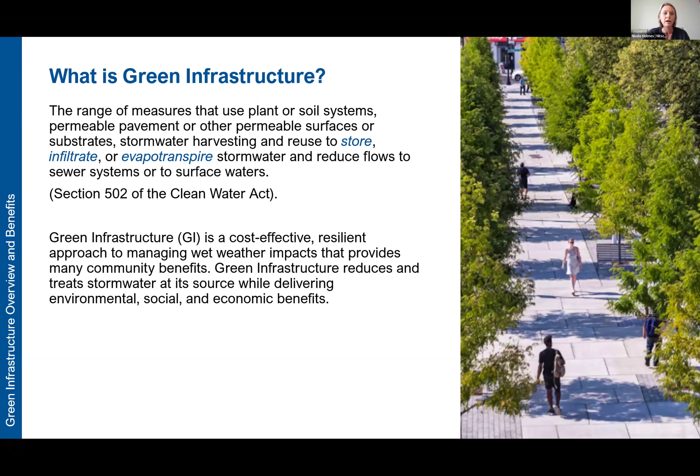I like to give this contrast of the way stormwater had been traditionally managed versus the way we're thinking about managing stormwater today. Really, green versus gray infrastructure, managing stormwater at the source versus end of pipe. So traditionally, catch basins and piping systems were designed to collect water as quickly as possible and get it away from the site as quickly as possible, discharging it to the downstream water body, causing environmental issues including water quality and downstream flooding and erosion.

We all know that. Green infrastructure actually strives to absorb the water close to where it lands, if not right where it lands, giving it a chance to be taken up by plants, to evaporate, to infiltrate into the ground. And only when those systems have exceeded their capacity would that water overflow to the gray infrastructure systems, the pipes, ultimately discharging to our water bodies.

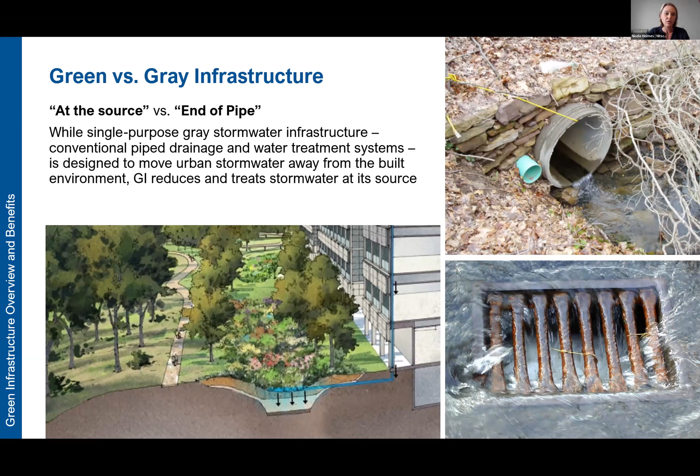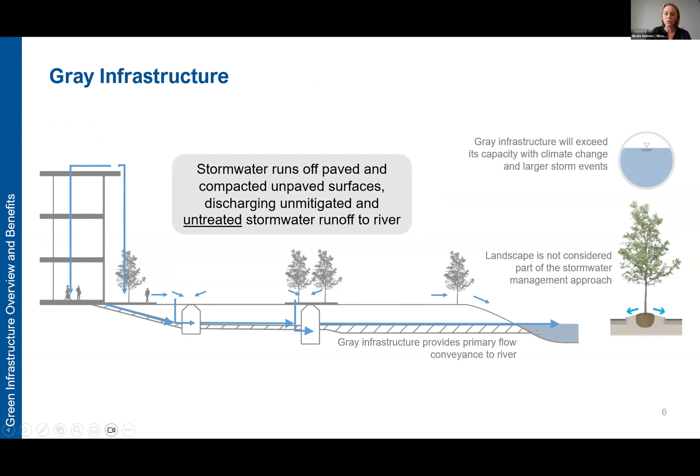So this is sort of just a cutaway. Let me just get this out of my way. A cutaway of what we're talking about here: collecting water straight from the roof drain, straight from pavements and parking lots, and discharging it to the local water body, versus considering green roofs or rainwater harvesting for rooftops.

Basically draining water from paths and walkways to adjacent depressed landscape areas using permeable pavements. And so you can kind of see all these arrows that we're starting to think about, all the ways in which we're trying to absorb water, get it into the ground, get it back into the atmosphere. And again, only when those systems have exceeded their capacity would we be considering overflowing the water.

So really this approach is going to take some time, but at some point in time, if we could picture an ideal world where everything was green infrastructure, all of that gray infrastructure that is currently completely under capacity for today's events, we could start to think about that as kind of being a secondary conveyance. Green infrastructure is the first priority, and the gray infrastructure can kind of become a secondary method.

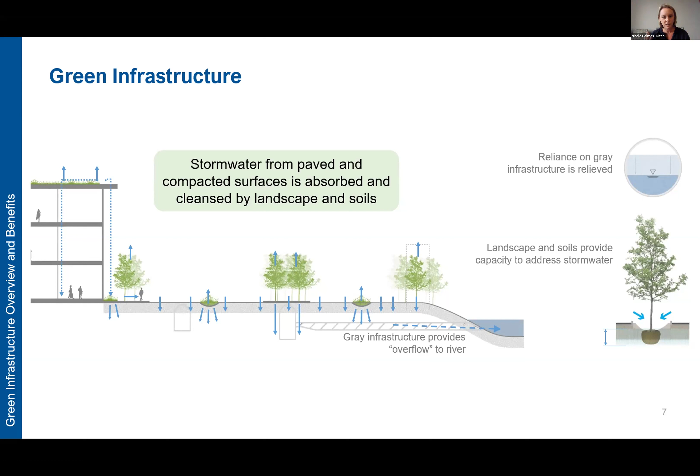And really the difference is that when you walk around, you see a lot of landscapes really barricaded by curbing, or the landscapes, instead of being depressed, are elevated. So we're starting to think about ways that we can certainly integrate stormwater and landscape as much as possible.

And then I mentioned this originally, and as I talked about some of the co-benefits beyond stormwater benefits, we know stormwater quality can be improved. Volume is reduced because we are infiltrating more water into the ground, and in some cases evaporating and reusing that water instead of allowing it to run off. And we are reducing peak flows because green infrastructure can absorb and significantly slow down water contributing to the storm drain system. But there's many co-benefits.

Some of them are measurable, like carbon sequestration and heat island and improved air quality. And some are qualitative, including improved quality of life. And there's definitely many studies that talk about the benefits of having more green infrastructure and trees in a neighborhood in terms of things like increased property value.

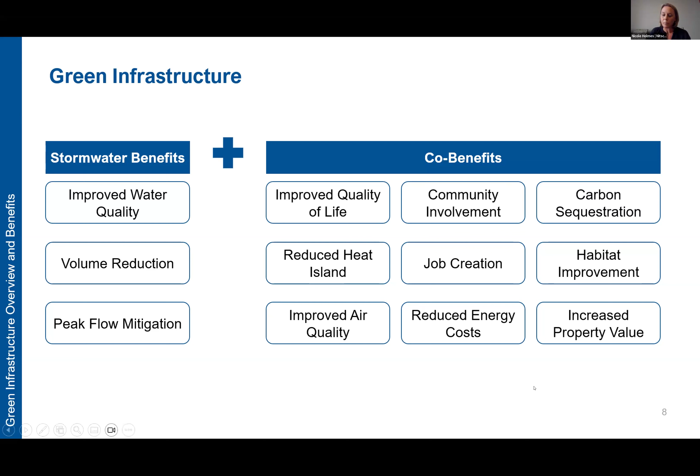So, here's just a sampling of some of the types of successful green infrastructure installations, or resilient stormwater installations. I think pretty much all that I have worked on and that my firm has worked on, and hopefully in collaboration with some of you, but certainly looking at bioretention practices, an innovative water quality treatment system at Kroon Hall. I'm showing some permeable pavements here.

And even a lot of these things, there's kind of a thought that it costs a lot of money to do these things, but that picture on the top right at Stonehill College is a very effective strategy. It's low tech, low cost, and low maintenance, and that's exactly what they wanted, but it's highly effective. Constructed wetlands, tree filters, and green roofs.

And we're also looking at some very large scale systems on campuses, including the system you see here at Princeton University, where we actually integrated a large scale stormwater system with a new geothermal system beneath a soccer stadium. And we worked on that in collaboration with Sasaki and many others.

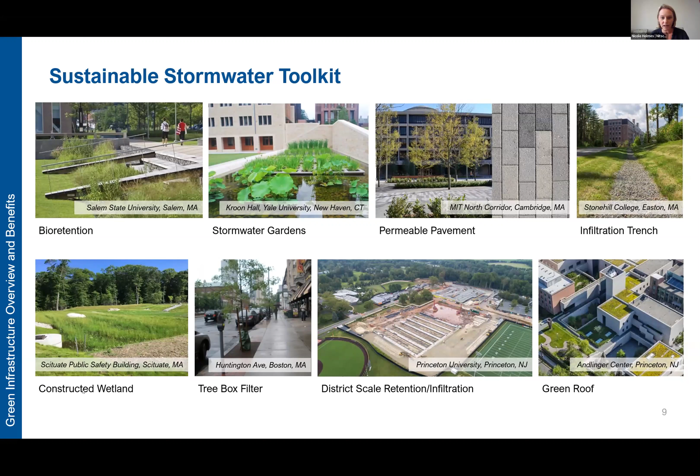All right, so I'm just going to share quickly a few resources. The first is the Boston Green Infrastructure Handbook, and you can find this on Boston Water and Sewer Commission's website, as well as the City of Boston's Green Infrastructure page, so you can get to it either way. And this was developed, I think, 2 years ago, really as a way to help start to coordinate green infrastructure planning and design in the City of Boston.

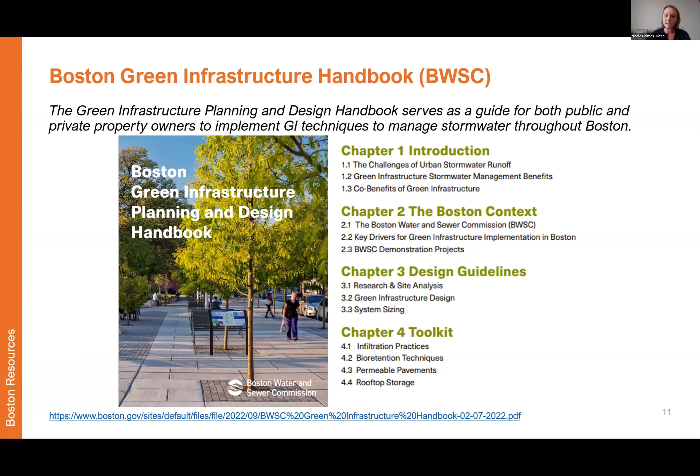So there's 4 chapters, and hopefully they can all be useful. It starts out with a very high level introduction, a lot of the things we just talked about in terms of an overview of green infrastructure and its benefits. It then gets into more about why green infrastructure is so important in Boston. But really the meat of it is in chapters 3 and 4, where there's some design guidelines and a toolkit that includes details and all kinds of information that hopefully will be helpful as you all design these systems moving forward.

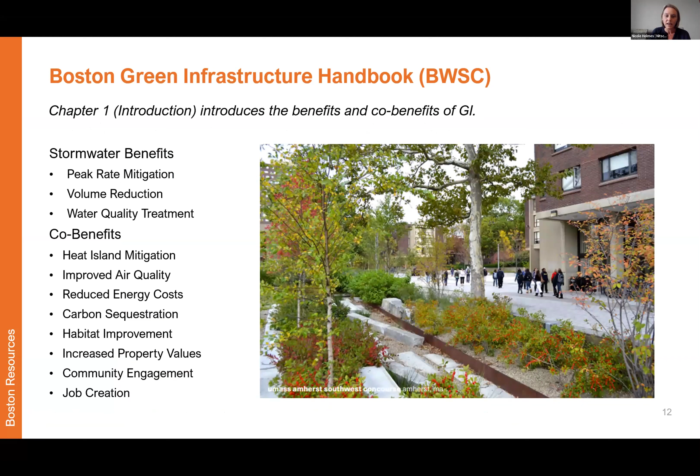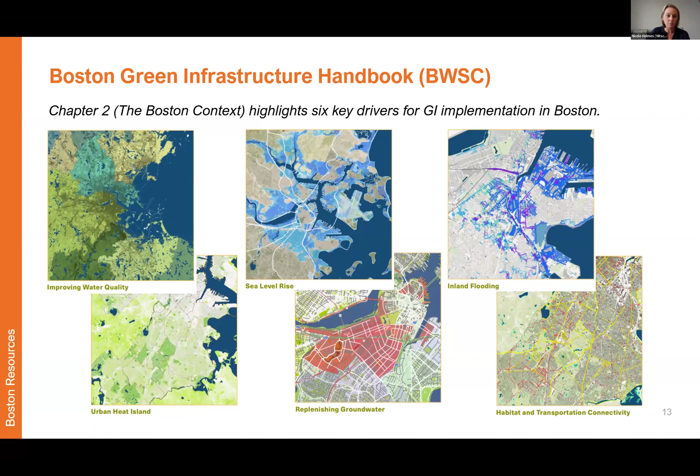So we sort of went through this: chapter 1 is the introduction of those benefits and co-benefits. Chapter 2, which I'm going to get into in a little more detail today, is really the Boston context and 6 of the key drivers for green infrastructure implementation in Boston. The design guidelines have a number of matrices that should be useful to you, including a suitability matrix and performance matrices.

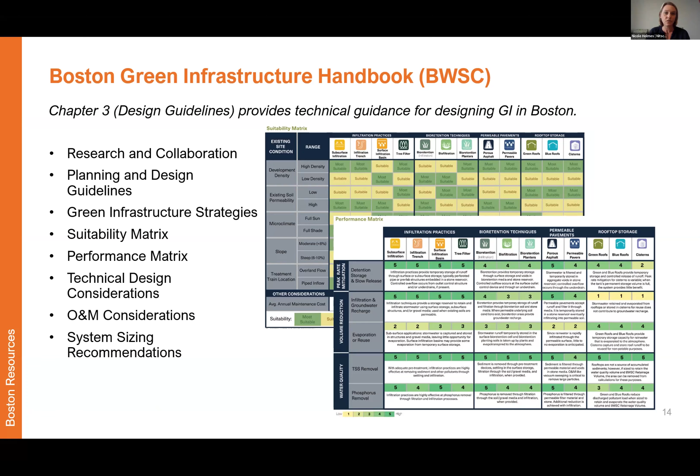There's a lot of technical design considerations and some initial thoughts about O&M and some recommendations for system sizing, particularly in Boston, in terms of how Boston Water and Sewer Commission is currently reviewing stormwater designs and how green infrastructure can fit into that. And then finally, here's just a few screenshots of what that toolkit looks like. There's some illustrative images and some details. The details have been coordinated with Boston Water and Sewer Commission and Public Works and others in the city, for example. So moving forward, these could be helpful starts to get going on some of your design of systems.

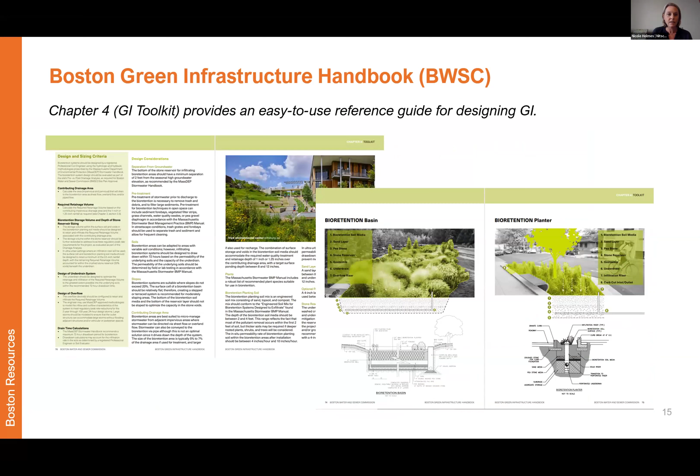And a supplement to that, which was just released within the past few months, is sort of the sister document to the Green Infrastructure Handbook, the O&M Handbook. So this is similarly arranged in 4 chapters, starting with an introduction and the context, but really getting into the types of inspection and maintenance actions that are necessary for green infrastructure. And that includes everything from more mechanical treatments for pre-treatment devices and such, to more landscape maintenance activities obviously associated with the vegetation and some of the other components of green infrastructure. And there's also some useful checklists in the back of the book that could potentially be helpful to you. We'll probably talk about this in our discussion.

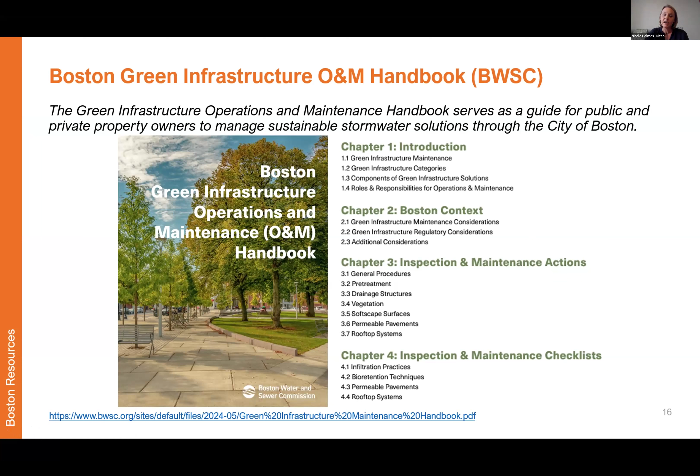One of the main barriers for green infrastructure, or the success of green infrastructure post-construction, seems to be centered around O&M, and whether it's the capabilities or funding issues, that is one of the major issues that we see locally and around the country. So hopefully this can be one step in helping with that coordination process.

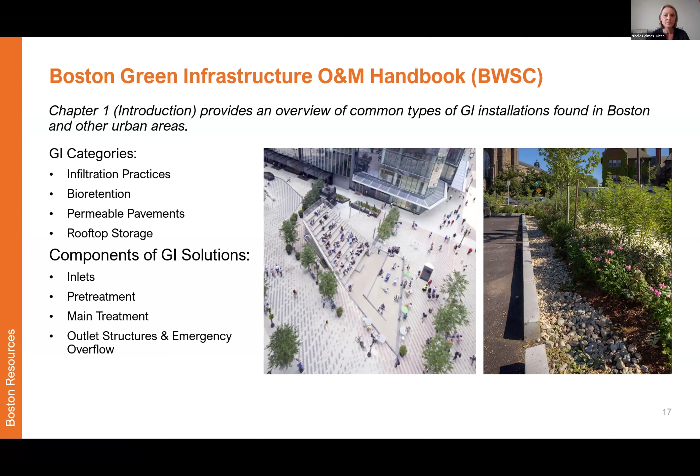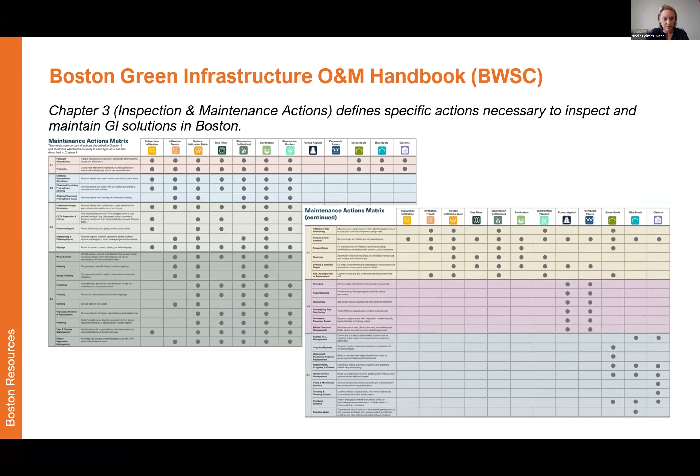Just kind of scrolling through here. These are some of the matrices that define the types of actions that are necessary to inspect and maintain green infrastructure solutions. So as you're considering green infrastructure on projects, this could be a useful tool to even have those initial conversations with the owners, so that you can understand whether they would have the capabilities and the funding to maintain green infrastructure. It's very, very important to ensure the success.

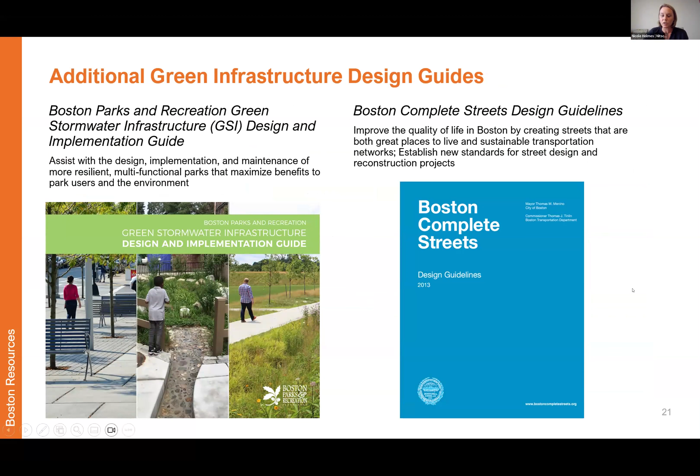And then finally, there are a few other resources in the city of Boston. You can link to these also from the city of Boston's green infrastructure page. Boston Parks and Rec developed a green stormwater infrastructure design and implementation guide. That's also highly illustrative and a great tool. And the Boston Complete Streets Design Guidelines, although focused on transportation safety, there are certainly a lot of recommended opportunities for integrating green infrastructure into city streets.

All right, time check. So I'm going to talk about the 6 key drivers for green infrastructure in Boston. I'm sure there are more, but these seem to stand out as really answering the question why. So we know that Boston area water bodies are impaired, and they're primarily impaired for a number of pollutants. The pollutant of major concern is phosphorus, and phosphorus in the Charles River, the Neponset River, Mystic River, and ultimately Boston Harbor has led to algal blooms and other water quality issues that have prohibited safe swimming and activities in the water bodies. So certainly water quality is a huge issue, and the wet weather discharge of stormwater has been attributed as one of the major reasons for that phosphorus impairment.

So the way green infrastructure can help is that, as we discussed, green infrastructure has a really high capacity for filtering and infiltrating nutrients, as well as other pollutants found in stormwater runoff. More traditionally, a decade or two ago, when we were focused mostly on detaining stormwater and maybe using manufactured treatment devices that just settle out trash and debris, those are slightly effective, but not highly effective for addressing nutrients because there's both soluble nutrients as well as nutrients that adhere to particles. So you can only remove the nutrients adhered to particles if you're settling. But filtration and infiltration techniques can get extremely high performance on removing nutrients, including phosphorus and nitrogen.

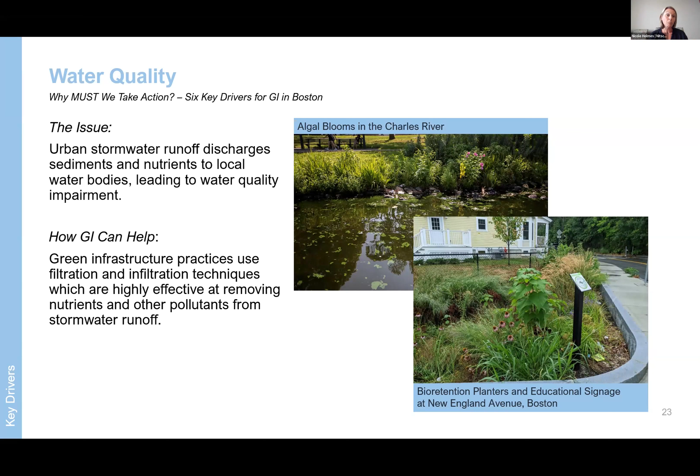So obviously, the city of Boston and Boston Water and Sewer Commission are very focused on water quality impairment. The Boston Water and Sewer Commission is needing to meet the conditions of a consent decree with the EPA and the DEP to take action and to clean the water bodies. So there's certainly a need to take a multi-pronged approach, and green infrastructure is one of the multiple actions they need to take to address that issue.

Very timely, as Erik mentioned, with the catastrophic flooding that we're seeing in other regions of the country. Boston is also highly at risk for coastal and inland flooding. So this is focusing specifically on inland flooding. We know that we're seeing more and more extreme precipitation events. The capacity of our infrastructure is completely not adequate to be able to withstand the amount of precipitation that it's trying to convey. And it's leading to more and more instances of inland flooding.

So green infrastructure is part of the solution. It's not the solution, but we're certainly looking for ways to actually optimize and even increase the retention capacity and detention capacity of green infrastructure even more than the norm, which is typically to try to retain about an inch or so, all in an effort to start to think about how we can help alleviate those overtaxed storm drain systems.

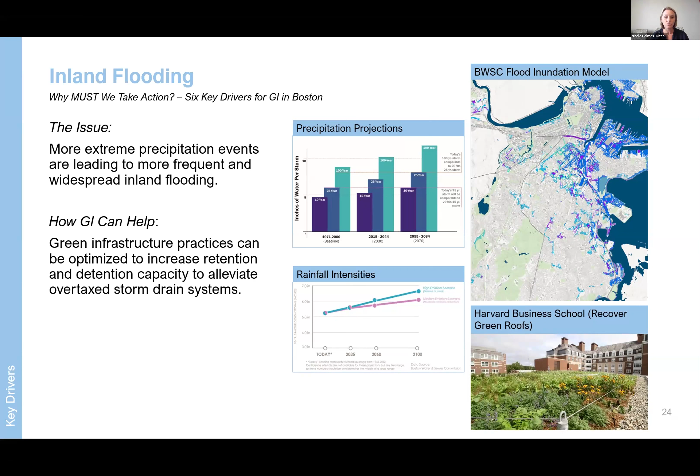In Boston specifically, we're concerned about sea level rise. That will not only continue to trouble the development and redevelopment in the city, but it will continue to exacerbate the coastal and inland flooding conditions. When we have sea level rise and we pile on top of that a coastal event, we have to realize that almost all of the outfalls from all of the inland drainage systems are trying to drain to the harbor or the rivers that are completely flooded as well. So it pushes back and back and back the amount of flooding that we'll see.

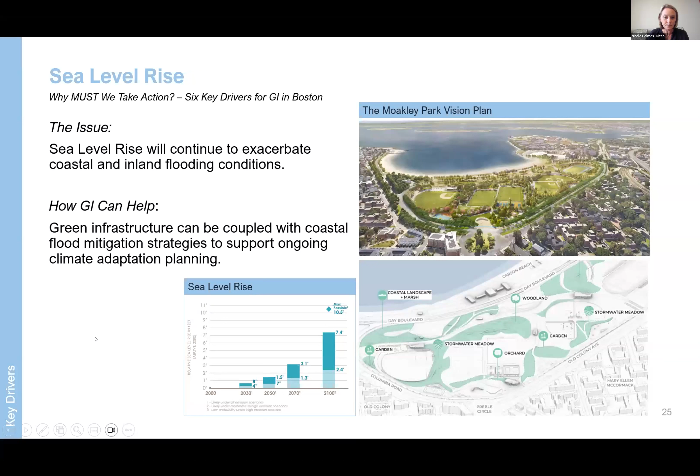This is one that's actually very unique to Boston, and this is groundwater recharge as one of the key issues, particularly in the Back Bay. Boston has a zoning district, which is called the Groundwater Conservation Overlay District. And in that area, we find most of our historic buildings, and the historic buildings in the Back Bay, for example, were seeing that as the groundwater over time was depleting because of impervious surfaces and the lack of groundwater recharge, those piles were subject to rotting, and many of the historic buildings in those areas were at risk of structural failure or issues because of that.

So getting groundwater actually into the ground has been something that Boston has been doing for a few decades now in that area of the city. And what green infrastructure can continue to do is to help to direct stormwater from impervious surfaces into the ground to help replenish at least those shallow aquifers that have been depleted over time.

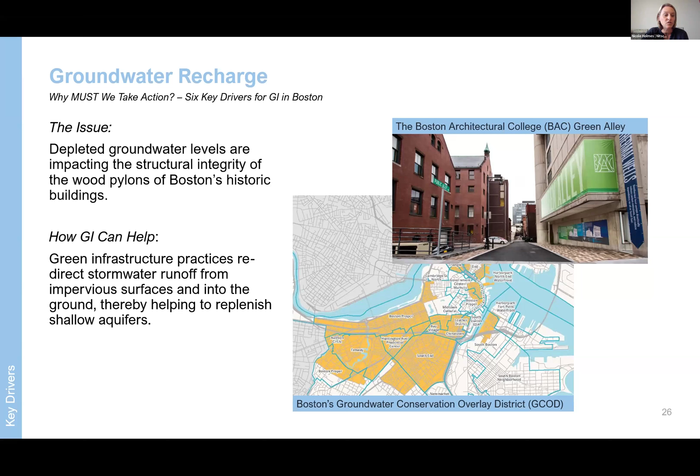So this is something that's very unique, but when you see maps of green infrastructure and infiltration installations across the city, you will definitely notice a very, very heavy presence of them in those zones. And it's because of that regulation in the GCOD, where at least managing an inch or more has been required for all development, as I mentioned, for quite some time.

And then finally, we're getting into some of the co-benefits here, but urban heat island is a major issue in our city and many others. And so anytime we can help reduce impervious surfaces, shade impervious surfaces, we are helping with that issue. It's a huge priority here in the city of Boston, and coupling all of these green infrastructure projects are certainly checking the box on our water quality issues and all of the other issues we described so far, as well as helping to reduce urban heat island.

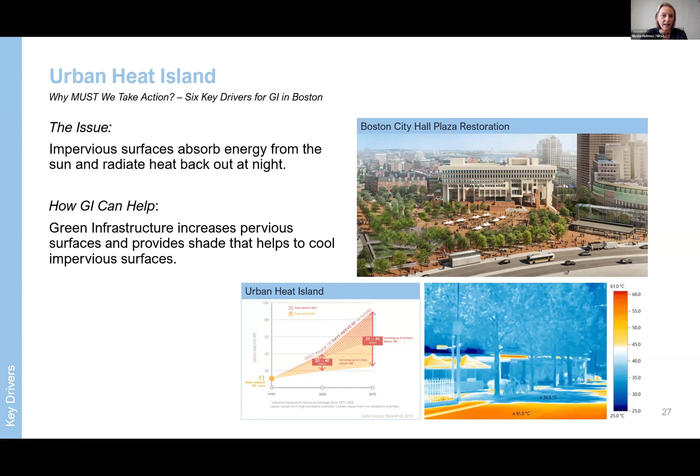And I think there's just a lot of other opportunities for integrating green infrastructure in collaboration with many of the other initiatives that are happening here, including obviously everything associated with Climate Ready Boston, but also these improvements to our transportation network are definitely opportunities with traffic calming. We're finding a lot of ways to integrate, for example, bioretention curb extensions at certain key crossings where BTD or Public Works are actually looking to implement safety improvements. So we're seeing a lot of success there, and we're definitely seeing that green infrastructure can help support and enhance some of those habitat and transportation corridors that are being improved at present.

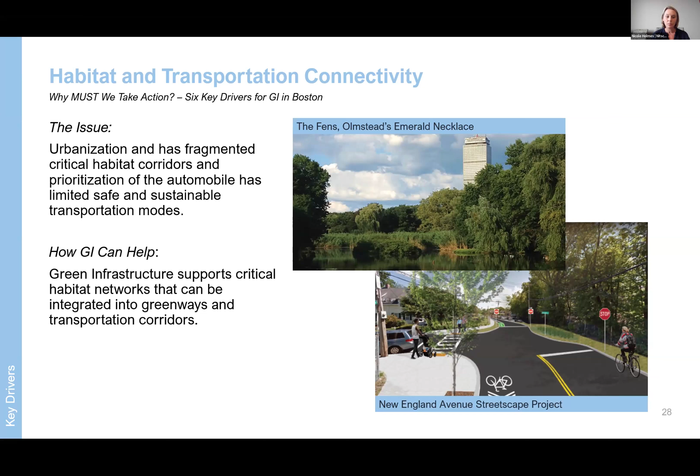And obviously just some other hot button issues that we've sort of talked about here, but we're just seeing more and more issues with stream degradation, aging and failing infrastructure. And in parts of Boston and Cambridge and in other cities around the country, they still have combined sewers. So when excess stormwater is contributing to those sewers, they do tend to still overflow during major storm events.

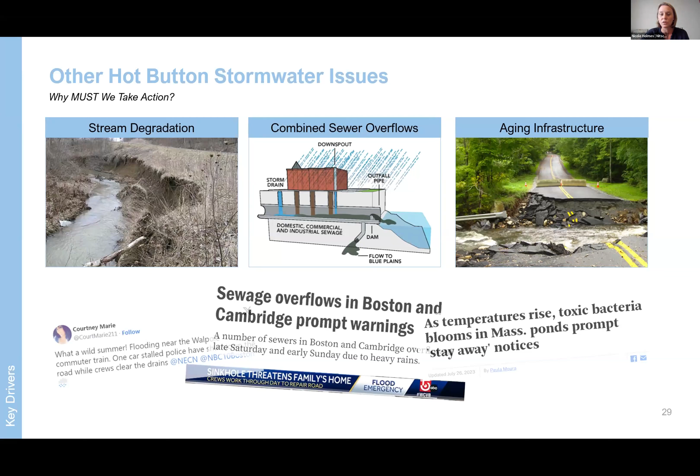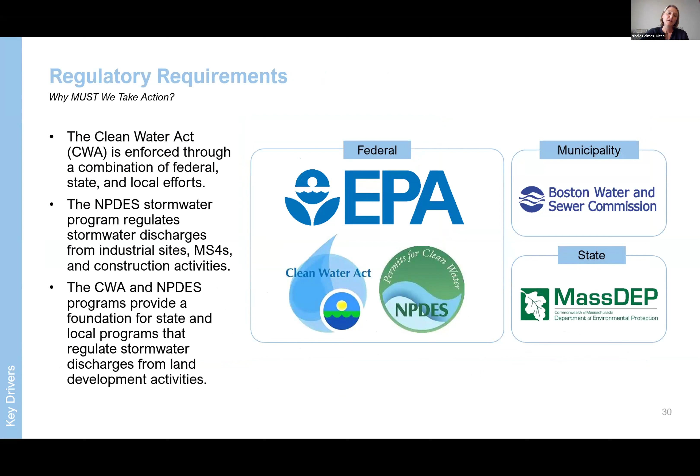And so green infrastructure is something that can kind of help to reduce stormwater flows and the timing of stormwater discharge to combined sewers to help reduce combined sewer overflows. And I'm not going to really get into this, but of course more and more regulations are sort of catching up. Little by little, it's happening both at the federal level, the state level, the municipal level. Here in Boston, we have some requirements.

Redevelopment projects are required to manage stormwater. There isn't currently a mandate to do so with green infrastructure. There is certainly a push to do so with infiltrative techniques. So they're highly effective, but much of Boston's stormwater management tends to be hidden and underground. And I think it's something that I personally and this whole group is advocating for: more visible green infrastructure in the form of green roofs and bioretention, some of the other measures that we talked about here.

So large projects are certainly needing to kind of go through this exercise of talking about how they will be meeting the standards, how they will be addressing coastal flood risk, inland flood risk, and the like as they move through the permitting process. And the state of Massachusetts is also in the process of updating their DEP Wetlands Protection Act and the Stormwater Management Handbook. And finally, there is more of a mandate for moving forward with green infrastructure. So I think we're going to see more and more from the regulatory side that this is coming.

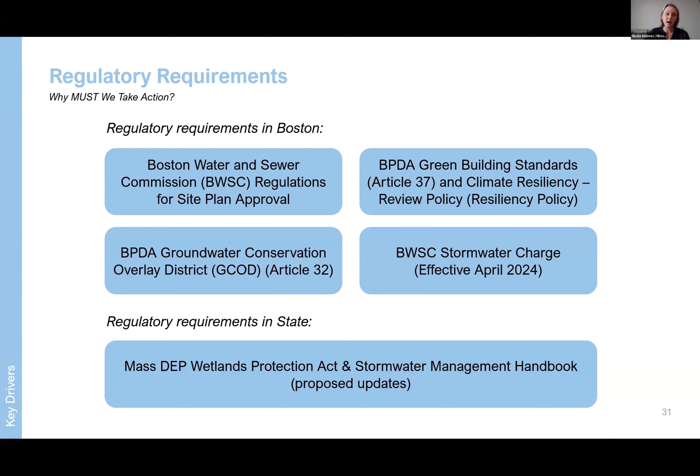So far, where we have seen the most implementation of green infrastructure is where it has been more voluntary, in terms of projects setting their own aspirational goals, aligning with LEED or ASLA SITES or Living Building Challenge and others, and really kind of pushing the benchmark of what is required, which tends to be very backward looking, and tends to be based on historic rainfall events.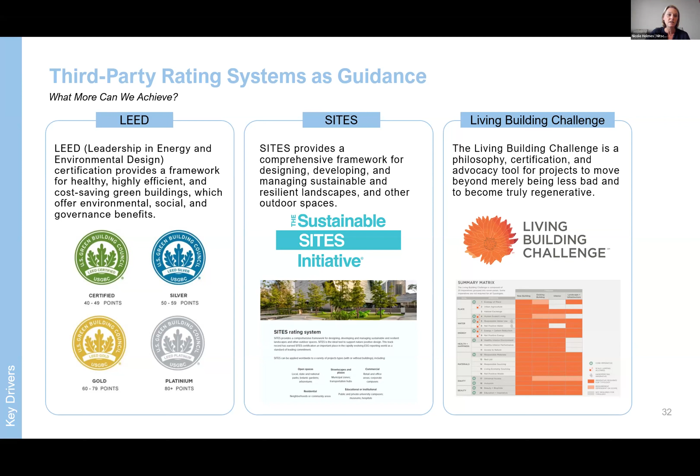We're wanting to look towards the future and designing our systems to consider the future, that we're beginning to have more and more projections for what those more intense events might be. We have more capabilities with modeling, that we can actually model some of these extreme storms and see how our sites could react to that. So there's lots changing, and a lot of opportunities moving forward.

I'm going to jump quick, and then within the next 10 minutes, we want to definitely go into our conversation. But as I mentioned, I brought forward a few talking points that I had pulled together for the Grey to Green conference, which was the Green Roofs for Healthy Cities conference. I think it was last year. And I was asked to talk about, from a civil engineer's perspective, what I saw as some of the barriers to implementing green roofs. And I think some of these apply to ground-based green infrastructure, but more so green roofs.

And the first issue I saw was that we have sort of siloed design team roles and responsibilities. And one of the greatest benefits of green roofs is actually managing stormwater. There's obviously many, many others, but from a regulatory perspective, that is one of the measurable benefits that you would potentially want to take credit for on a green roof. So one challenge that I had seen on some projects that may not be utilizing an integrated design process was that there were a lot of conversations going on about green roofs and about whether a green roof should be or should not be, or is a benefit to the project.

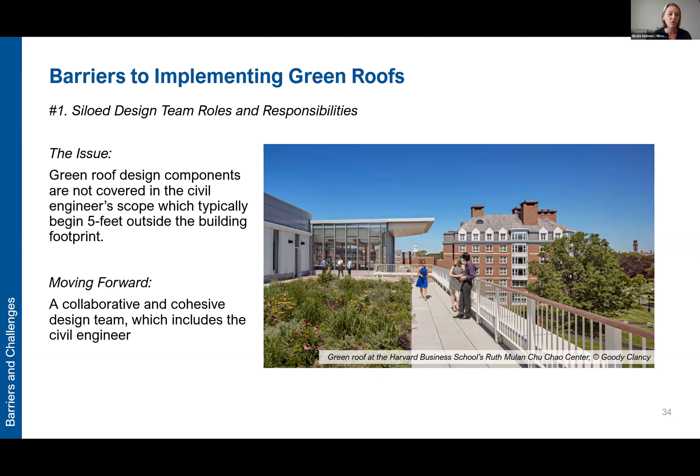But none of that scope technically is shown on the civil engineering drawings. So if they are not aware that those discussions are happening, they may just be designing a stormwater management system that meets regulations, that meets the goals of the project, sort of in isolation. So then you're sort of double dipping when it comes to thinking about the cost of the green roof. And there's a lot of work that needs to be done to coordinate those. So really the long and the short is that to have a successful green roof, we need a collaborative and cohesive design team, including the civil engineer. I mean, this does happen on most projects now. I'd say that comment is a little aged at this point.

One thing we've also seen is that green roofs tend to get on the chopping block quite often, and I'm sure you've all experienced that same issue. And the reason being is that what ends up happening sometimes is that if the green roof is not necessarily locked in on a particular project, the civil engineer then is being asked by their client to go ahead and design a full stormwater system on the site.

And so then when you give the owner or the client the opportunity to compare the cost of a green roof to maybe some lower tech solutions that are on the ground, it doesn't help the cause at all. And that's something that we've definitely seen.

So we like to be sure that when that conversation happens and someone tries to compare the cost of a green roof to, say, an underground infiltration system on the site, that is not an apples to apples comparison. The infiltration system on the site is only managing stormwater. It is not providing all of the other benefits of the green roof. So that is something I definitely caution when that comes forward, that you definitely need a true cost benefit analysis to be able to make that decision with your client.

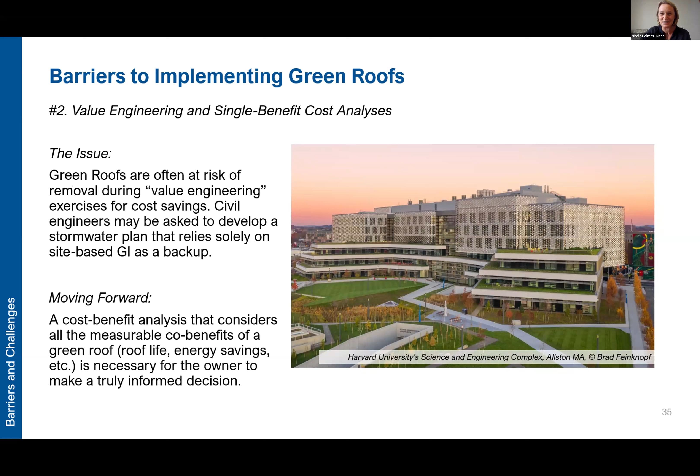And by the way, the beautiful Harvard Science and Engineering Complex that was Erik's project was an example of a project that did not have these issues. Just wanted to bring that up.

So policies and incentives are coming forward a little bit more that we can see. For example, the city of Cambridge actually has a green roof policy that has certainly helped move the benchmark on adding more and more green roofs in the city of Cambridge. But really, there just needs to be, in my opinion, more incentives, more policies for green roofs. And obviously more study about the benefits of combining systems such as green roofs and solar.

I feel like I hear so much that we're talking about two competing interests, but we actually had a speaker last year who brought forward so many examples, particularly from Europe, where green roofs and solar coexisting can actually be more performative for both goals, for both the energy goals and the stormwater goals. So that was really interesting to see.

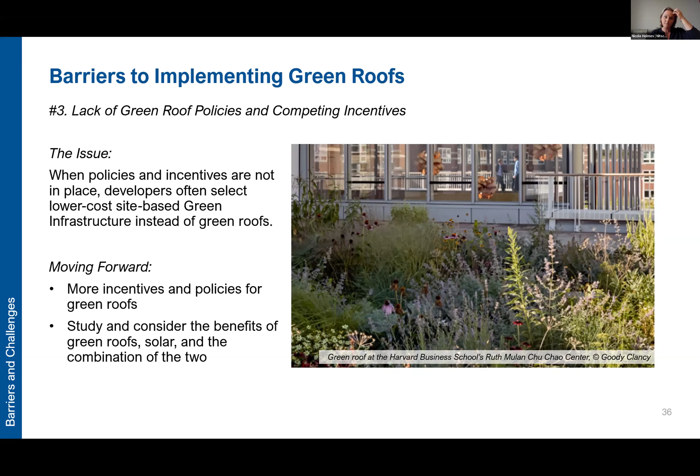And I think I touched on this a little bit, but another barrier to green roofs is really just the timing of the permitting process. A lot of times for very complicated projects, permitting has to begin very early. And in some cases, the building team, the architects and MEP and others, may only be around 50% DD, or maybe trending towards 100% DD. And they may not have made the decision as to whether the green roof is in or out.

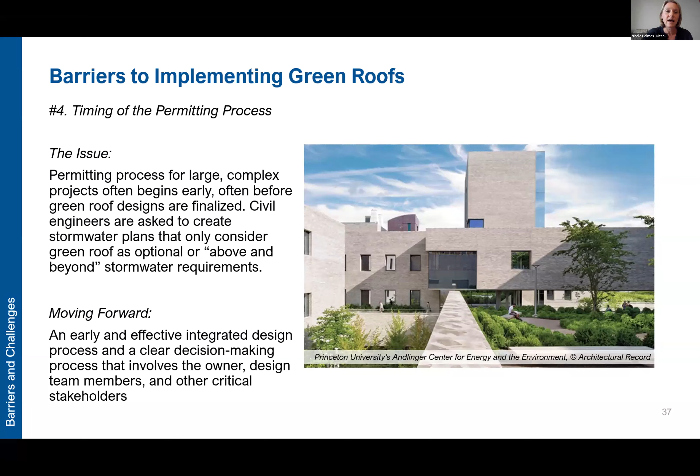So unfortunately, we as civil engineers may be asked to get the permits with a design that handles all stormwater on site. And at that point, it becomes, well, I don't need the green roof anymore for stormwater. So that's another way that I've seen a green roof hit the chopping block when that timing becomes an issue. I'm not sure how to overcome that timing, but locking in the goals of the project early and ensuring that the integrated design process is happening is one way to help with that barrier.

And I talked a little bit more about this in the conference, really about how modeling tools for green roofs are a little bit limited. A lot of stormwater modeling is really based on thinking about how water interacts with the ground and through soils. And so there have been a lot of ways in which we're learning how to adapt our modeling tools to properly manage a green roof.

But most of the guidance coming from regulations is very, very conservative. So a lot of times we're not allowed to take credit for all the good work that a green roof is doing. So it's something that we're actually internally at Nitsch Engineering doing some research on and working with some different green roof vendors to help push that a little bit further.

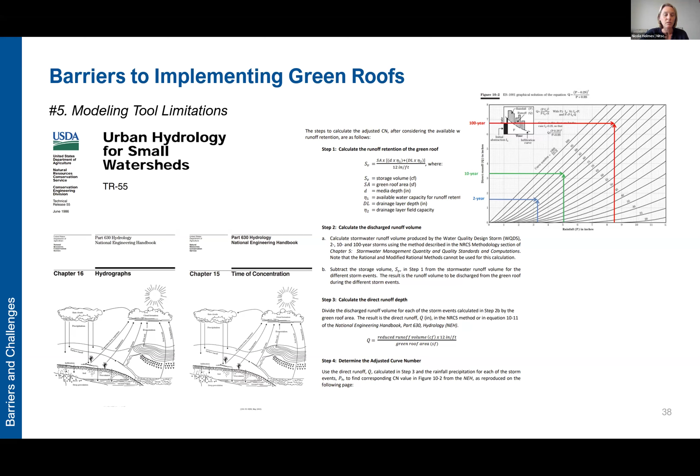So I want to jump into our discussion in a moment, and I just had some closing thoughts about moving forward, what we're seeing. We're definitely seeing regulations finally catch up to the thinking about climate change and needing to think about stormwater more holistically. MassDEP regulations are being updated.

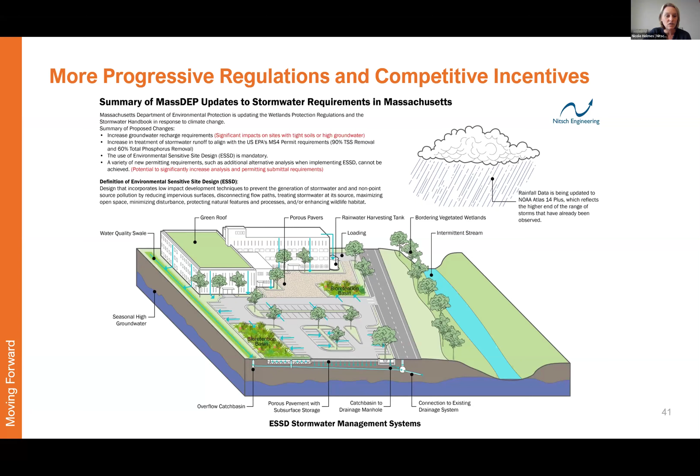We're seeing in other states such as New Jersey, there's actually a mandate for managing stormwater using green infrastructure. So you are no longer, without a waiver or variance, allowed to manage stormwater with conventional systems such as detention-based systems. We talked a lot about this, and we can get into this a little bit more. With these systems being more integrated amongst many different disciplines, the success is going to rely a lot on stakeholder engagement and the integrated design process.

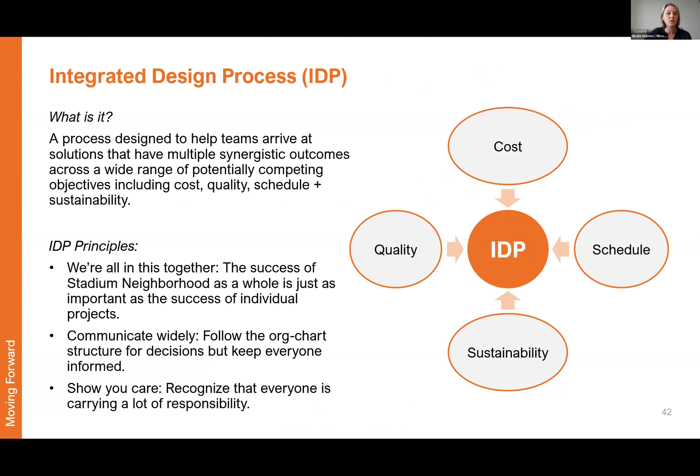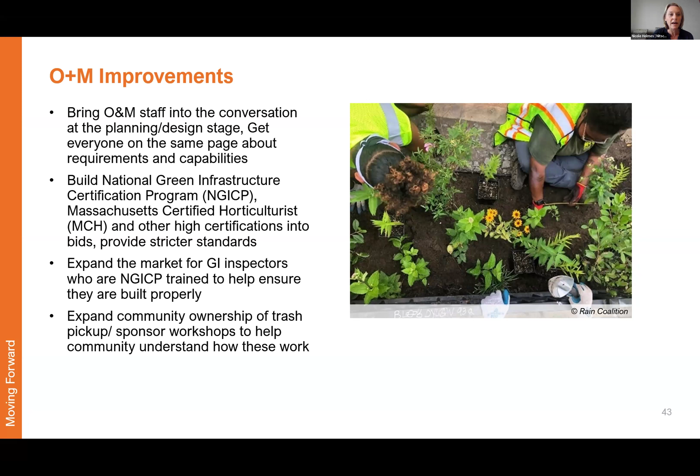I talked a little bit about O&M being an issue. A lot of the green infrastructure case studies that some folks may hear about are actually bad stories: this thing looked beautiful when we first built it, but now it looks terrible. No one can maintain it, or we don't have the funding to maintain it. So that's certainly something that I know the City of Boston is working very hard to ensure, that green infrastructure built in the city is properly maintained. So we'll see more of that moving forward.

And finally, as I mentioned, a lot of green infrastructure has traditionally been thought of as a tool only to manage small storms. And that is definitely where it is most beneficial, for absorbing the first inch or so, evaporating the first inch or so, infiltrating the first inch or so. But we're really looking for ways that we can further optimize and perhaps stack different strategies so that we can leverage both the benefits of the green infrastructure as well as the need for storing more water during some of these major events.

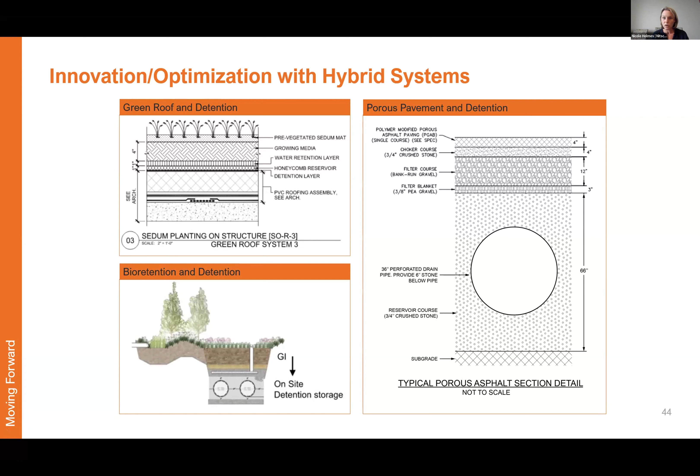So for example, we're looking at ways that we can stack a bioretention system and basically expand the storage reservoir below to hold more water, to function better in the large storms. Same thing for permeable pavement, same thing for green roofs.

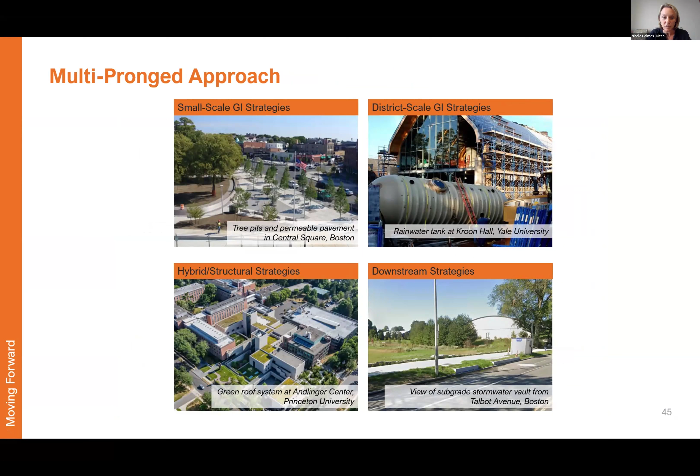And I think I talked most about these, just really starting to think outside the box and thinking about how green infrastructure can be leveraged at a small scale, but also, given some of the large-scale watershed-wide issues, we're starting to think about stormwater at a neighborhood or a watershed scale, thinking about opportunities, more endpoint strategies, as well as integrating stormwater with buildings, particularly with green roofs and rainwater harvesting. And I think I talked a little bit more about that.

And at this point, in some cases, we're kind of struggling with the vulnerability of our existing assets. And then thinking about the difference when we are doing new development. So we're wanting to think about proactive approaches. When we are redeveloping, we're not only thinking about the type of events we have today, we're forecasting and we're modeling future events so that we can be sure to design sites today that are more resilient to the changing climate.

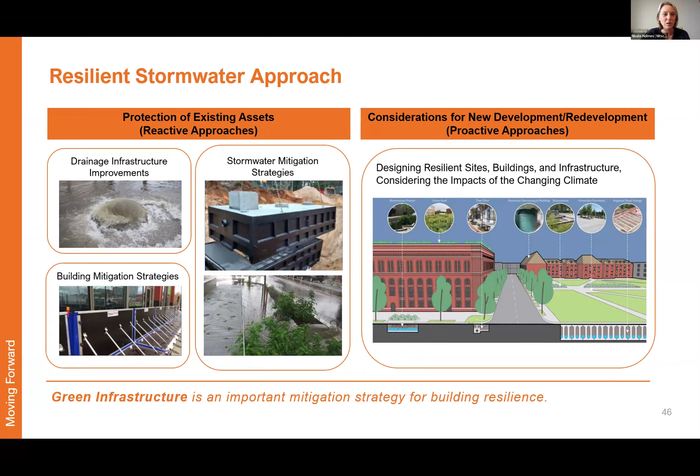All the while, in some cases, we're literally needing to armor existing buildings and other assets that are vulnerable to flooding because of past development practices and aging infrastructure and all the other things that we talked about today. So I think there's a lot of opportunities moving forward, and we can talk more about those now. Erik and Gary are going to jump back in with me here.

That's great, Nicole. Thank you. I think we will open it up for others that might have questions. If you want to raise your hand, we can pick you. Or if you just want to jump in, feel free to jump in, unless we start getting too many people talking over each other. I might jump in for a second while folks are developing their questions. Sure.

If I go back, for instance, Nicole, to your barriers list, there's a few things that pop out for me. I represent maybe a group of architects, and we've got a large representation on our call today. But maybe as an awareness, I feel like what's really important in the integrated design process and bringing everybody to the table at the beginning is, maybe in the case of buildings, coming up with a water budget, a back of the napkin.

There are so many tools that, as a civil engineer, you're obligated either by code or by different regulations to follow. And then the plumbers, for instance, have another set of ways that they need to calculate things.

And it gets really complicated really fast, which is why you need to have everybody at the table at the beginning. But what I also stress is that you can also almost overly simplify the equation to where is water coming from and where is it going. And I'll throw something up on the screen, for instance, just to kind of illustrate that.

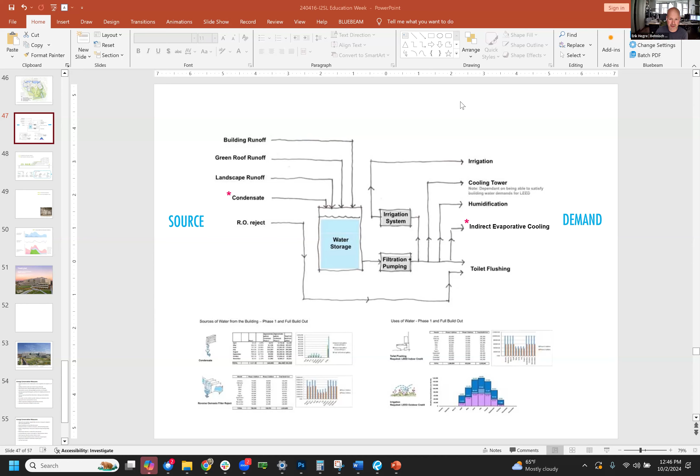Absolutely, I agree. That is just such a great example that happened so early on and in such an integrated way between four or five different disciplines that it really helped. Everybody had a detailed understanding of the goals and the issues, what's possible, what's not, the scale of the problem and the scale of the needs, and it ultimately led to confirmation that yes, this project needs a green roof. And yes, we were thinking about water as one type of system and all the reuse that went into there. So that is an amazing case study that overcame all those barriers, particularly with the process.

I think it also demonstrates the complexity of all this stuff. So it's really hard sometimes to get some teams, all the consultants, on board with it. Sometimes one consultant not buying into what this can be can derail the whole thing.

Yeah. The effort to reuse stormwater and/or condensate is great, and it can potentially help with stormwater management. But some civil engineers might say that we're just going to plan for that storage to be full and not really think of it as anything that would help with stormwater management, because you've just collected it, it could be there from two weeks ago and it's full. You haven't used it. So it's hard to get beyond some of those hurdles. So it's great to hear about projects that can do it. We're trying to understand how to better figure that out and model that.